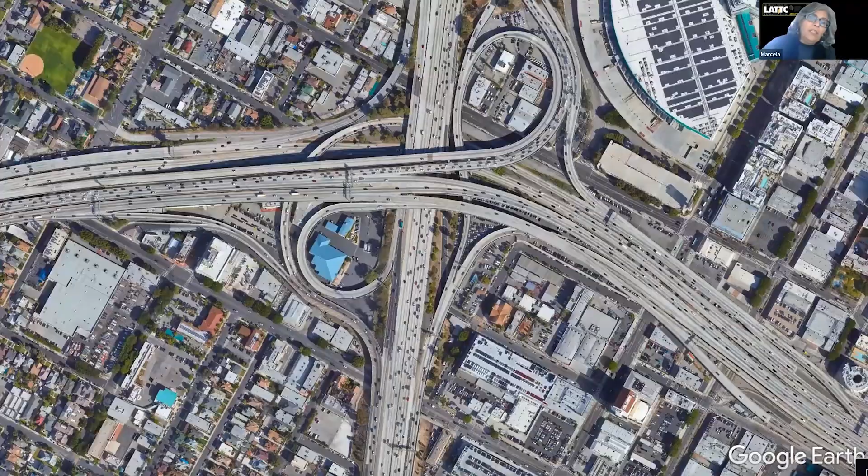These are the 5 categories that we will be covering. As you guys know, LA Tech is very close to the location, a 20-minute walk or 5-minute drive. This is the area, on 12th Street and Alvarado, very close to the gas station, a lot of pedestrians. Our idea is to change the ground cover to allow using some pervious material to allow the water to go into the watershed.

And we're going to be combining it with activities for the design of the park. These are our partners. We have two classes, and we also have David Waite, without whom I don't think the project could have happened, and also Studio MLA, and a lot of alumni that have contributed. So Brittany and Dave will be presenting also.

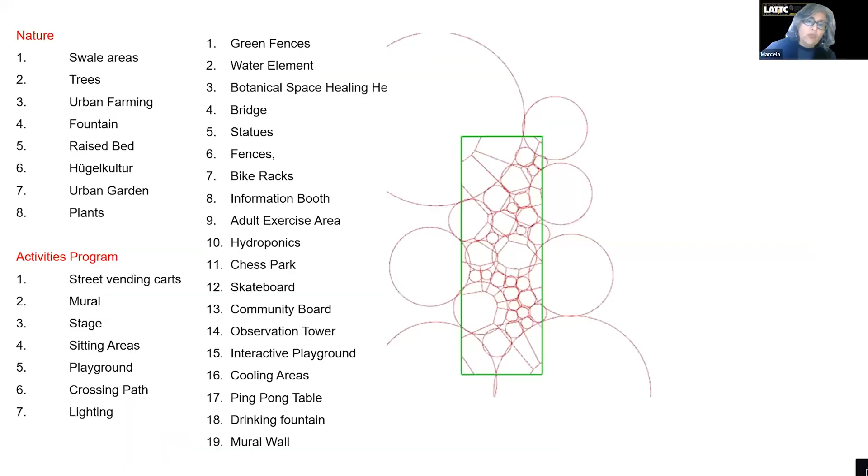So what we're doing here, we're actually creating a solution where we identify all possible activities that a park could have, 35 to 40. And then we're beginning to create an artificial intelligence where the community will be a designer, will be an architect, and will be an engineer. This will create more job opportunities because we will require more architects and engineers, so this will just accelerate.

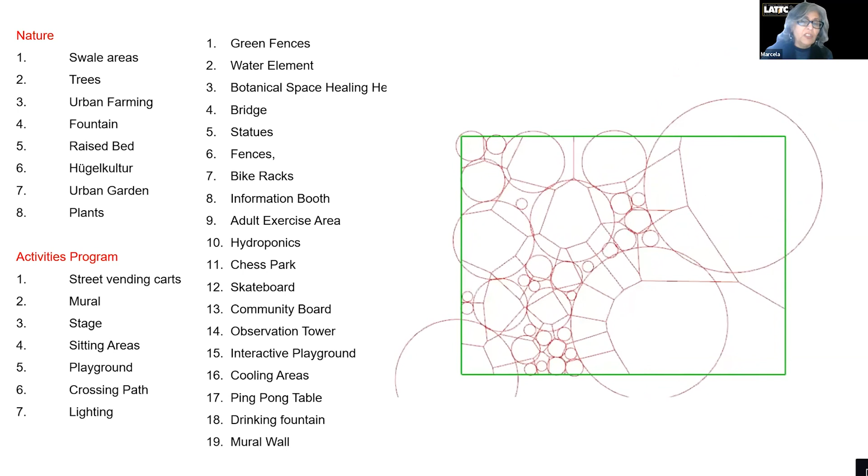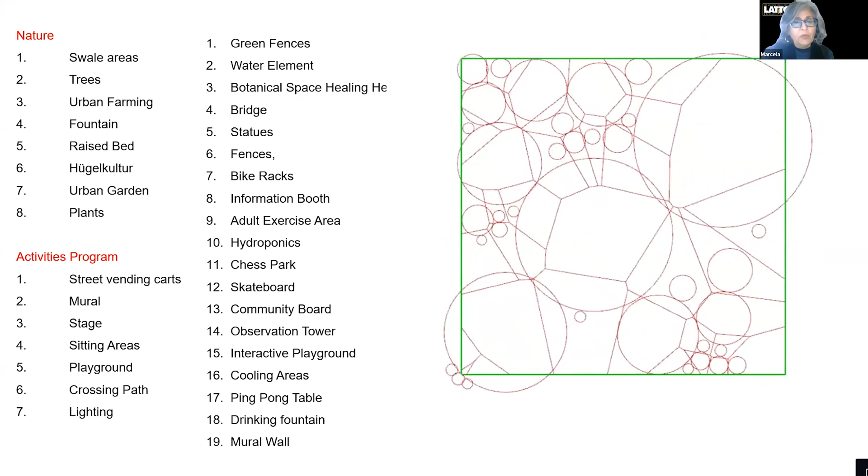We need to create at least 1 pocket park per week due to the population growth, and we're so below average. So here on the right, you can see a parametric driven design of how the community will be able to identify what they want in that particular park. We're using Pico Union Park as a role model for a project that can be scalable and duplicable.

Some might want to have an observation tower. Some might want to have a drinking fountain. Some might want to have 2 murals. Here's an example of how you have a grid inspired by biomimicry, and then you have a program where the community can drag and drop.

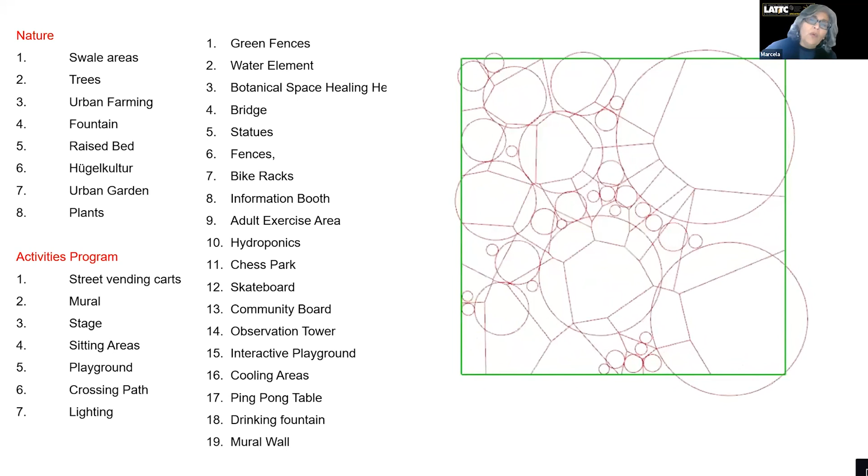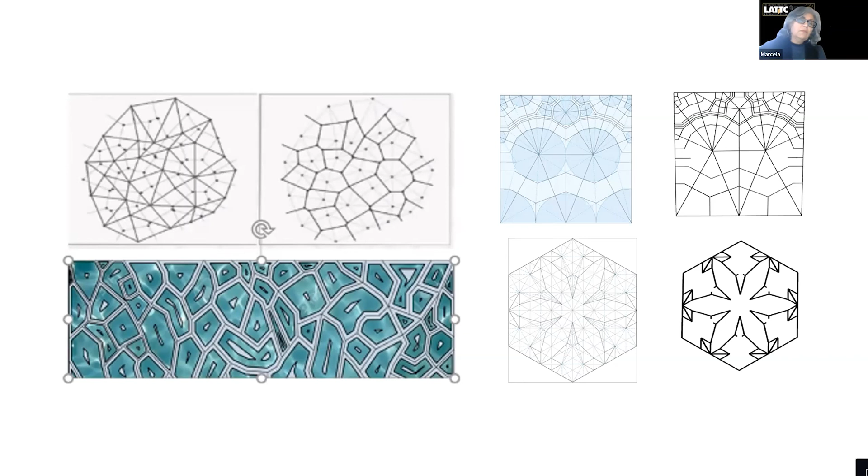And this is a quick example — you're going to see about 10 solutions, and each solution has 3 or 4, so it's extremely scalable and duplicable. Okay, so to retrace our steps here, Professor Oliva conceptualized this process as a game board with its pieces, the pieces being the programs we just talked about.

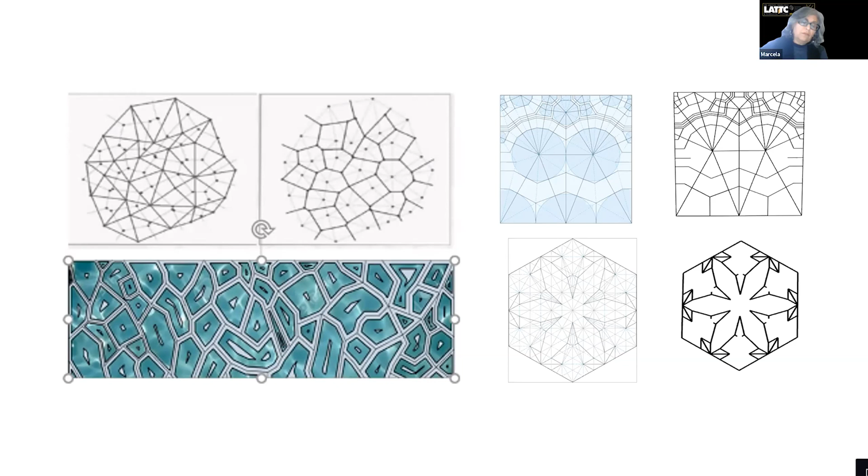So to design the game board, the students used patterns of biomimicry, which they traced in CAD, computer-aided design software, using SketchUp. Students experimented through patterns which provided a whole variety of pore sizes. And then after tracing these patterns, the students sat on them for a while and iterated them simply as drawings in and of themselves.

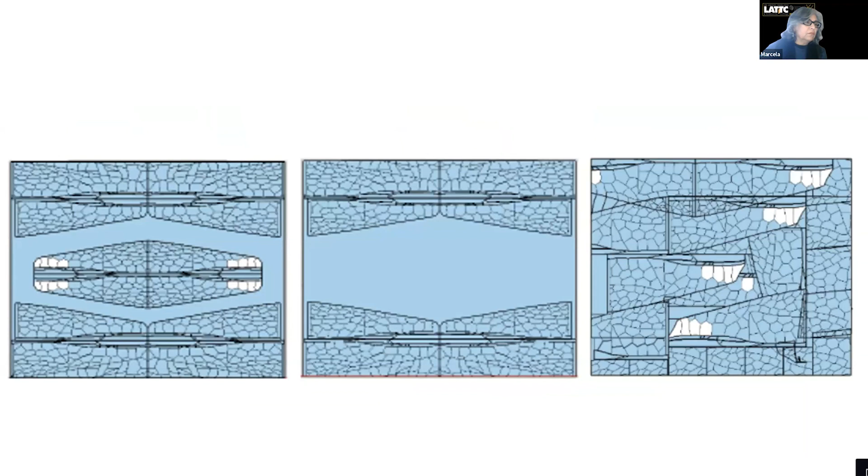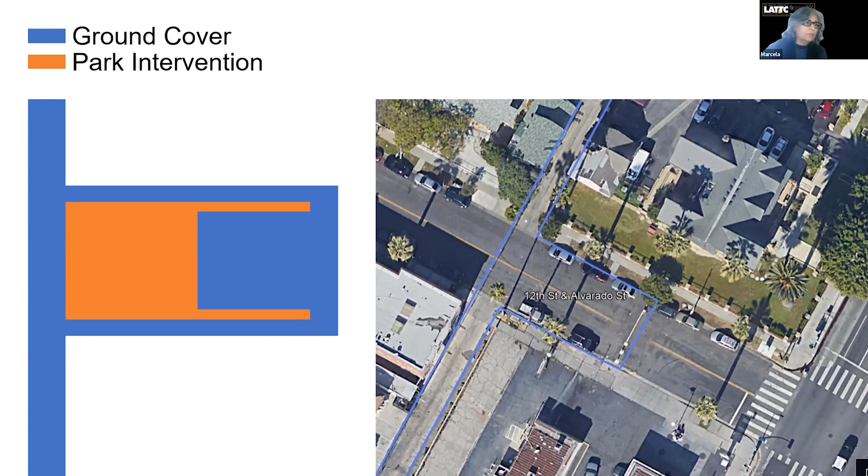So they played with the drawings as being capable of holding different tectonic properties. And what was so great about iterating this is it was totally void of scale and geography. Here's another example of how that played out in creating open space and tight space. So then after the drawing exercises, we stepped aside for a moment and looked deliberately at the site. Here, as mentioned, is the 12th and Alvarado site.

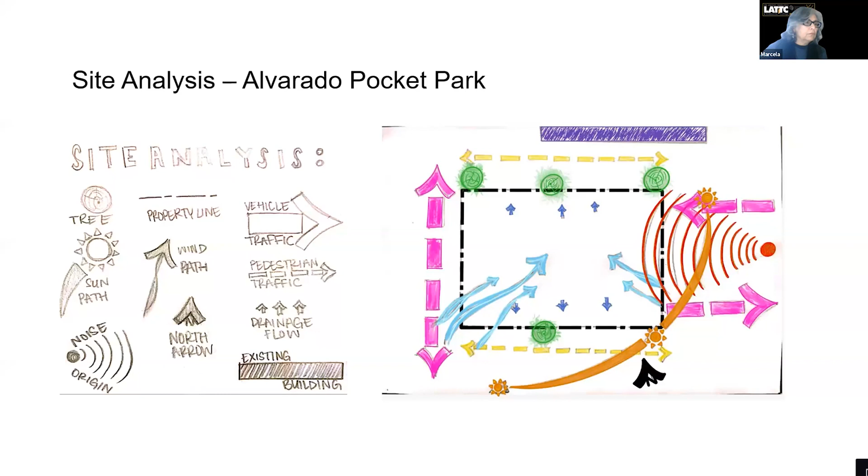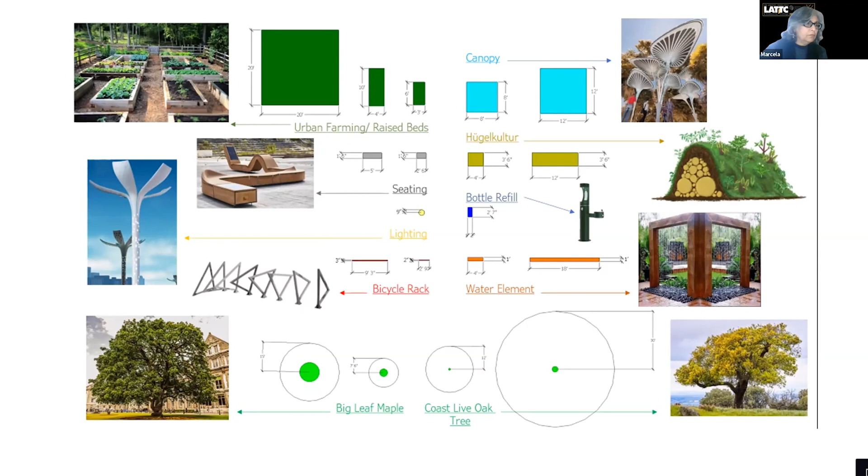So the site analysis metrics such as shade, sound, vehicle hazards, and visibility are some of the biggest design movers and shakers. So we pick those out and we'll show you soon how those affected these line drawings. At the same time, the students process the dimension requirements for unique elements throughout the park through precedent research and municipal code requirements. So the students were pretty much released to scour the internet for a whole bunch of parcel moments which really hit home to them.

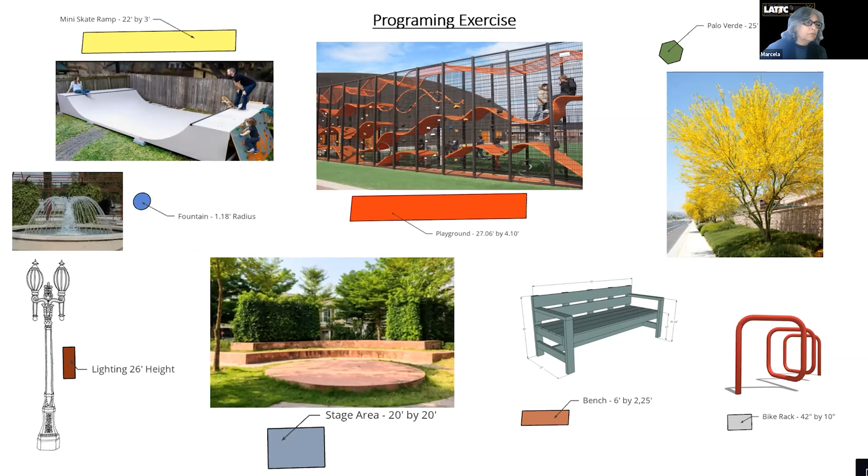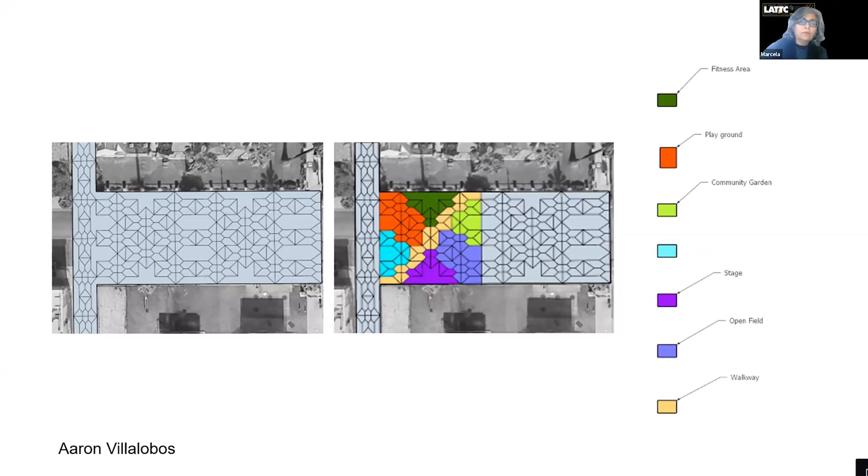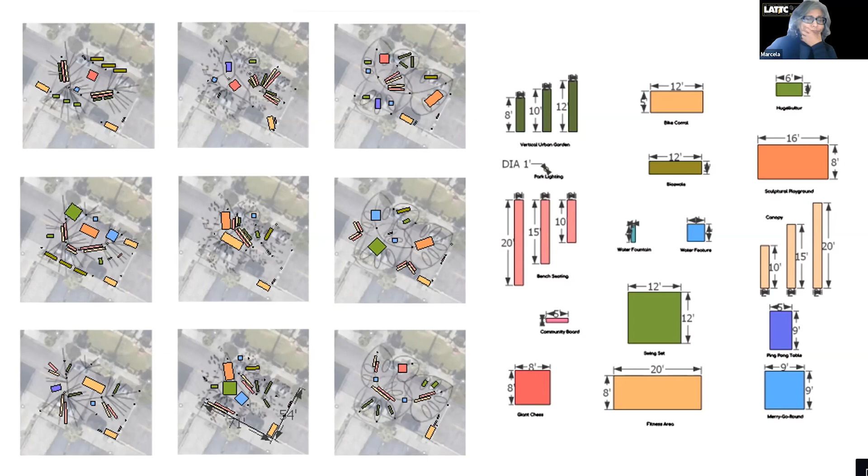Brittany's example here, you can see four iterations of using a Monstera plant as a design driver, engaging the alleyway as well as the street. And then what became interesting is Brittany's studies where she looked at the different programs and what could actually nest together, sit side by side, and which ones didn't work so well. And this kind of works algorithmically, but you absolutely have to have a designer in order to make this make sense.

Christina's drawings here were particularly interesting to us as she would leave SketchUp intermittently to hand draw how this would work out and then return back to software. And Marcos here shows another example of his studies. Ground plan, the last one we're going to show is Matheus's, which involved ground cover studies, almost like a pavement plan as that played with these different algorithmic areas.

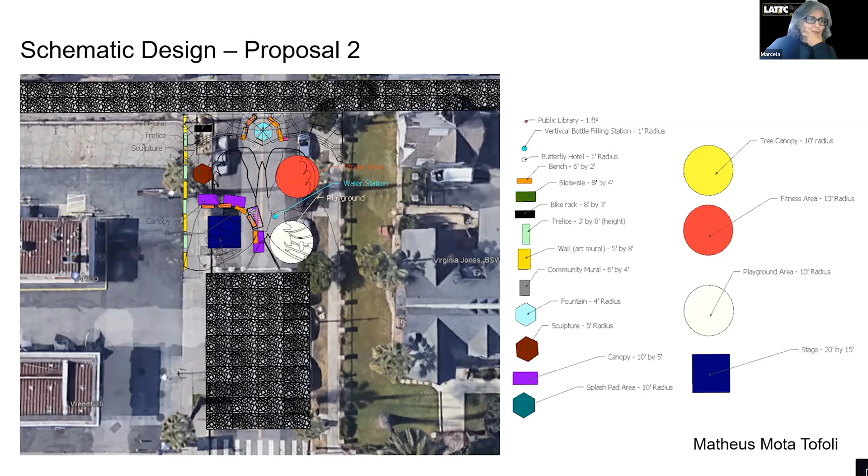So as we talk about how this translates from plan to being a real kind of imaginable park, there's a whole lot more information we need, and I'll pass it off to Britanni here.

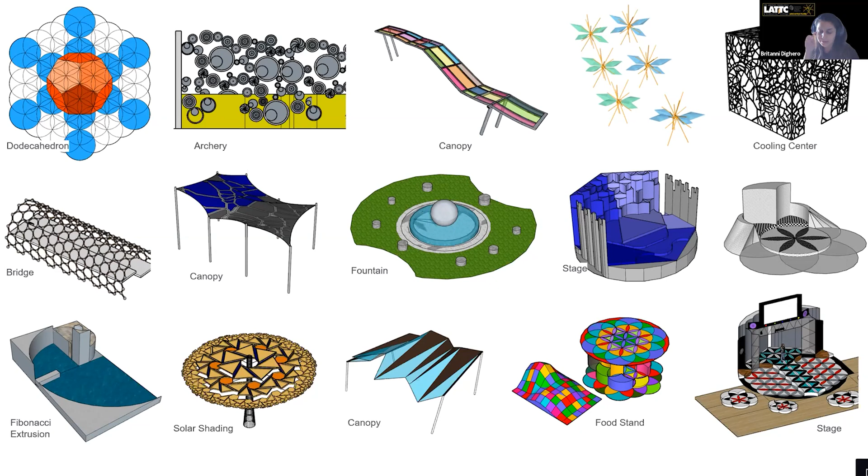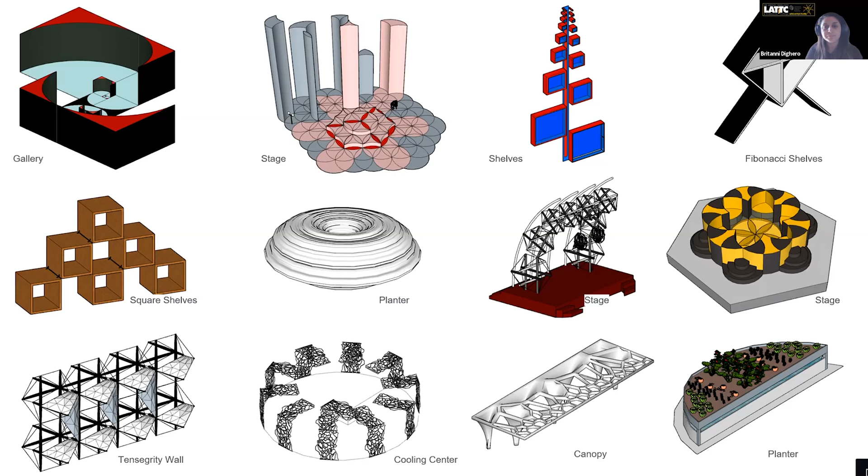Sure, thanks, Marcela. So as we move from 2D to 3D here, you can see that we have compiled a 3D warehouse based on all of the various student designs. This will ultimately help the community envision the park design. Here we can see shelves, stages, cooling centers, canopies, etc. Here we see more modular pieces and stages that students have designed.

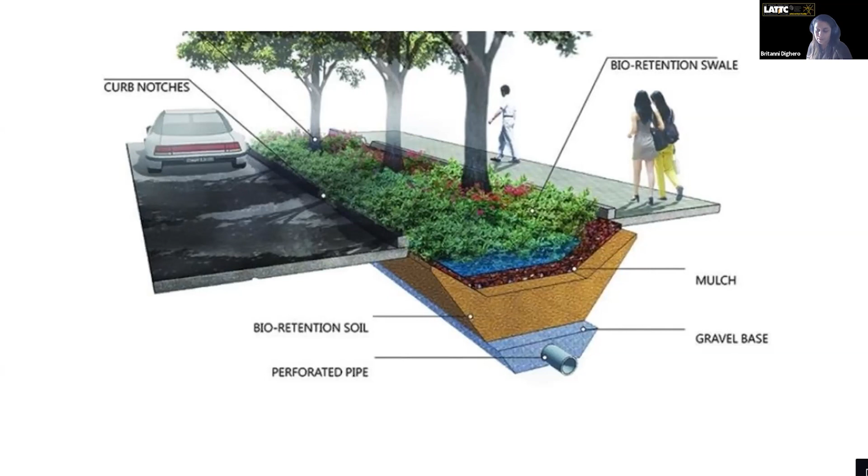We also did want to standardize some programmatic components across all student designs, such as the bioswale here, of course, to meet our goals. This is included in an effort to capture as much stormwater as possible. And we also utilize Calscape.org just to sift through all of our various options for vegetation in the park.

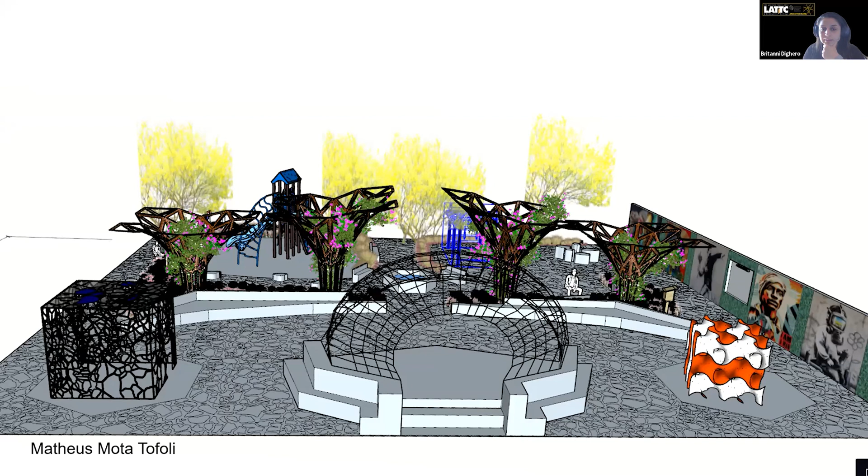So next here, we are going into the 3D schemas that our students have come up with. Here we have an example from Matheus, and we can see all of the various 3D elements in his design. Here goes another view of what that park might look like being used. So here we can see the canopy, the sculptural playground, the information booth of sorts, bench seating.

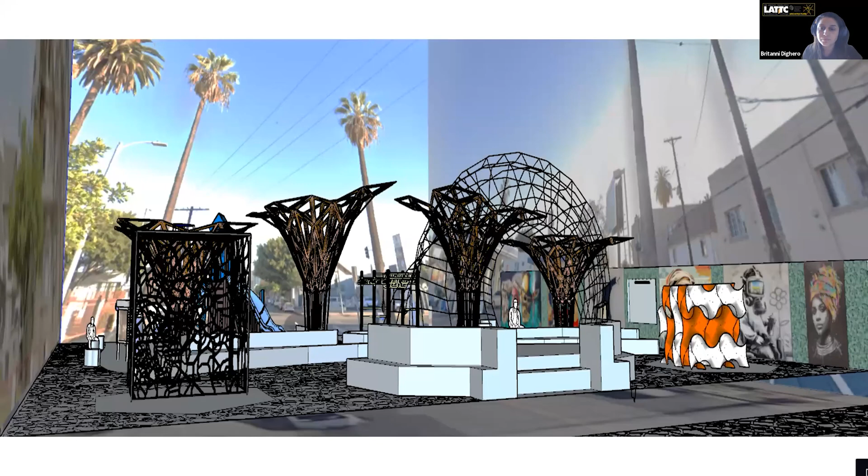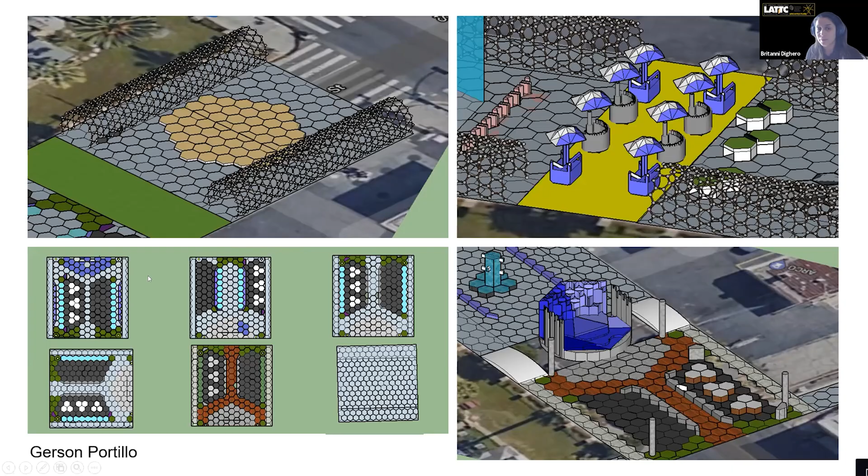And here goes one last example. So here we get to see the different design iterations that the students have provided. This as well will help the community envision what programmatic layouts are possible to begin with. From there, the students will take one of the iterations and then go ahead and populate it with the 3D components that they designed. And so here goes another example.

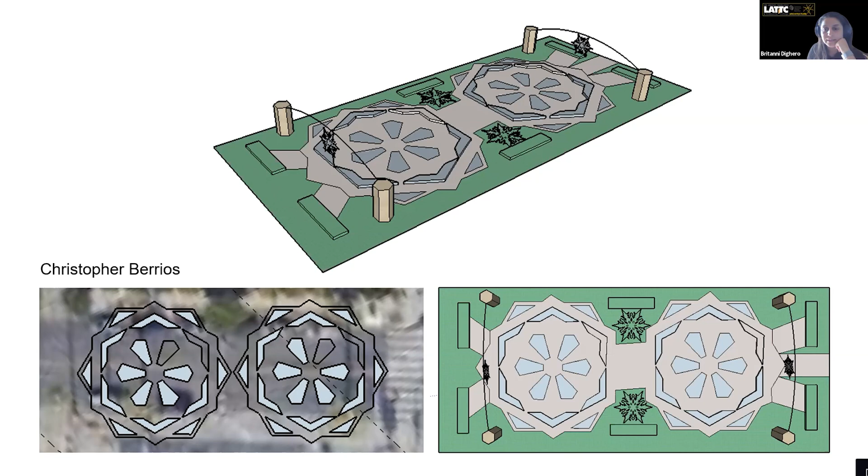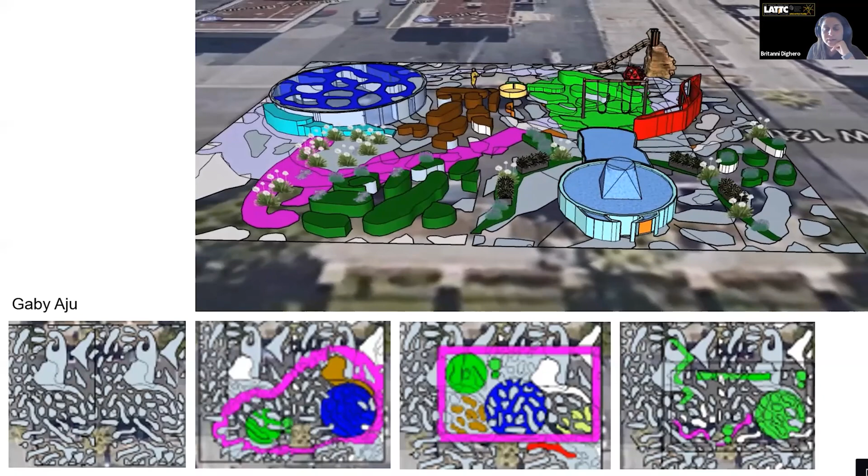And so we can see the various options that Gaby Aju here provided for us. You can see all the various park components she included. And that is about it for Pando Days 2021 for LATTC.

And just really quick, this is the idea of creating a platform where the community is the designer.

Well, thank you so much, Marcella, and to the team. Marcella, you've described this as a kit of parts in the past, and I see exactly what you're talking about here. That really comes across. Fascinating.

Okay, Randy Britt is the CSO task force representative right now. Randy will want to ask you some questions, Marcella. Randy has spent much of his career devoted to sustainability, and he's former Chief Sustainability Officer of Vanner Construction. He's now working as a sustainability consultant. Randy, I know that you have a great deal of expertise and background at the intersection of building things and sustainability, and I'm sure when you've watched the presentation, lots of those ideas have come across your mind. You have 5 minutes, over to you.

Yeah, thank you. My background is more the intersection of engineering rather than architecture, but a lot of years integrating with architects and engineers to design facilities, and did a lot of parks and park modifications with the city of LA, the county of LA, and also with LA Unified School District.